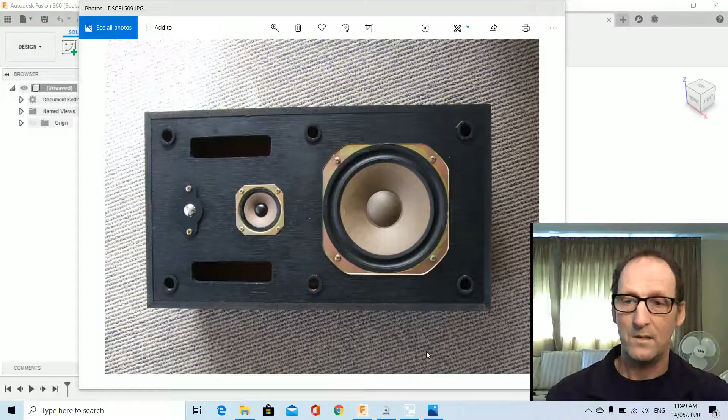In this video we're going to make a speaker bezel for this mid speaker in this three-way Panasonic speaker from back

in the day. I'm a secondary school teacher in New Zealand. We've been in lockdown like the rest of the world, and we've been doing online learning, but secondary schools, well actually all schools in New Zealand, start again this coming Monday, so I'm just going to do a bit of preparation here.

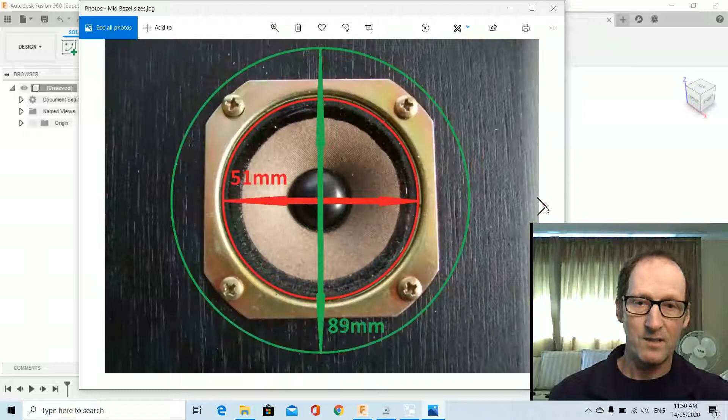Okay, so what we've got, there's the speaker there. It has a bit of a lip or indentation there, and those are the sizes that we're going to make the speaker bezel. Also location of the holes. Right, I'm going to get rid of this thing here now and go and show you because it's in the way a bit.

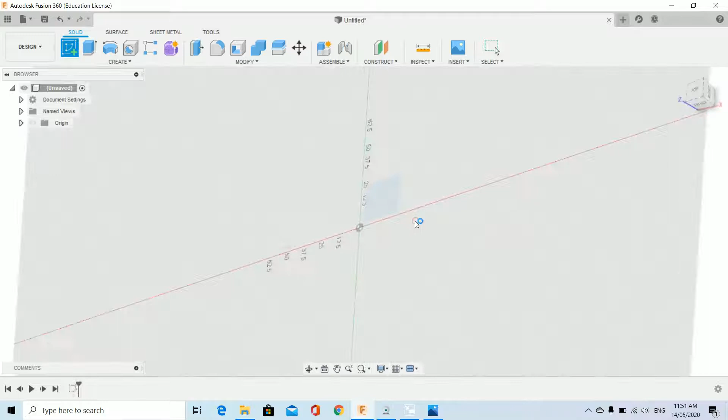Right, minimize this. Right, I'm going to show you 3 or 4 different ways. First one is going to be real basic. Create a sketch on the horizontal plane. Got to do 2 circles first, one 51mm, 51 enter, and the next one 89. And that should refer us back to, we'll go back, just double check, 51, 89. Finish sketch, could finish it here, click on that one, or it could be done down the bottom there.

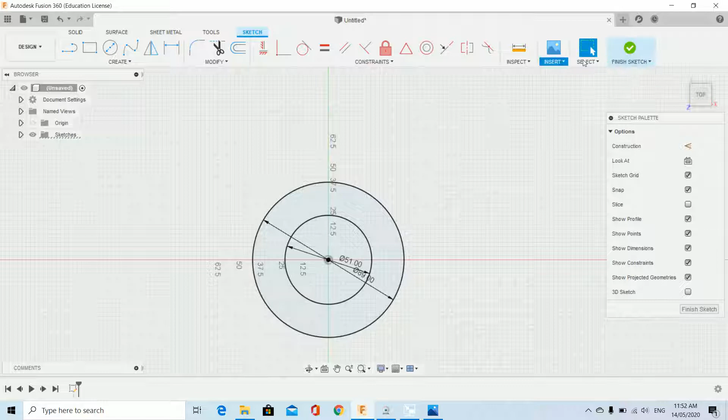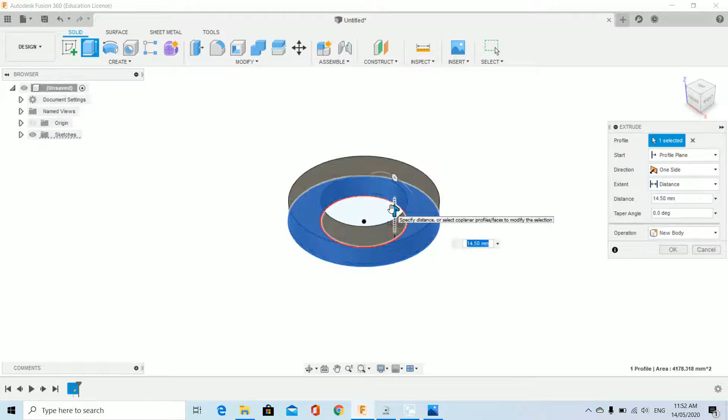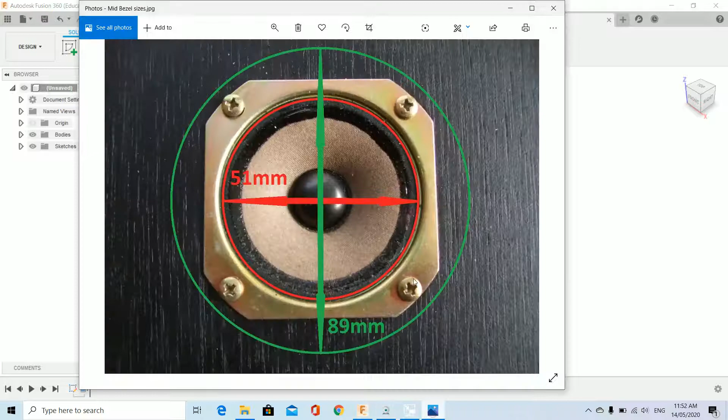The first thing I'm going to do is extrude those. So I'm going to right mouse click, press pull, not selecting the middle, I'm selecting the outer ring. I'm going to lift it up, about 6mm. Enter. Now I'm going to turn this around because in our speaker, where it lips in, I have to create a bit of a lip for it. In this part here, and then back lipping down over the edge.

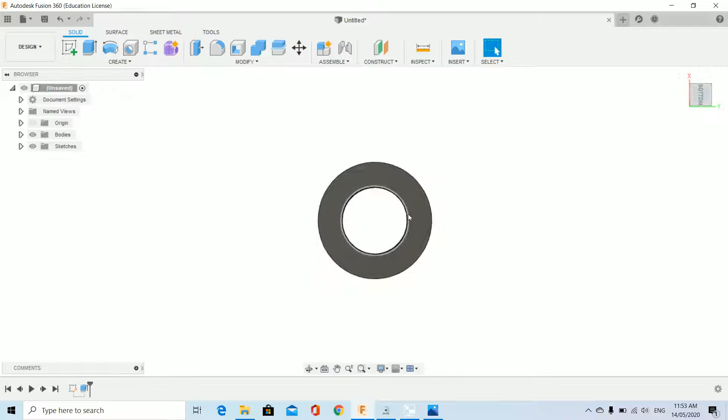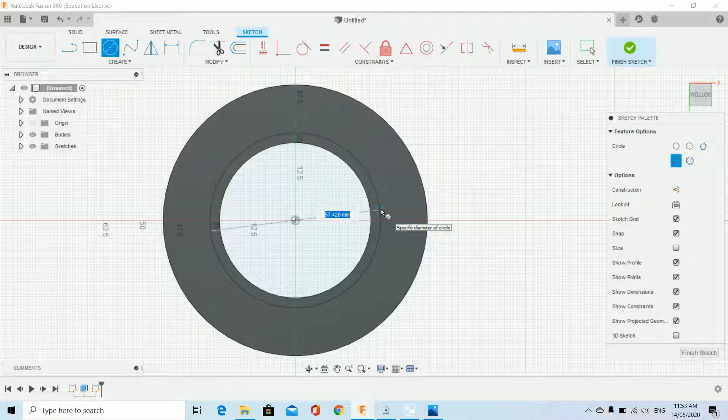So we're going to create another sketch, but I'm just going to flip this around first. Create another sketch. We're going to do it on that face there. And I'm going to do some more circles. So center point. We're going to have a 2mm lip there. So instead of 51, I'm going to have to go 55. And then I'm going to do another one. This one needs a 5mm lip, so we're going to make that 79.

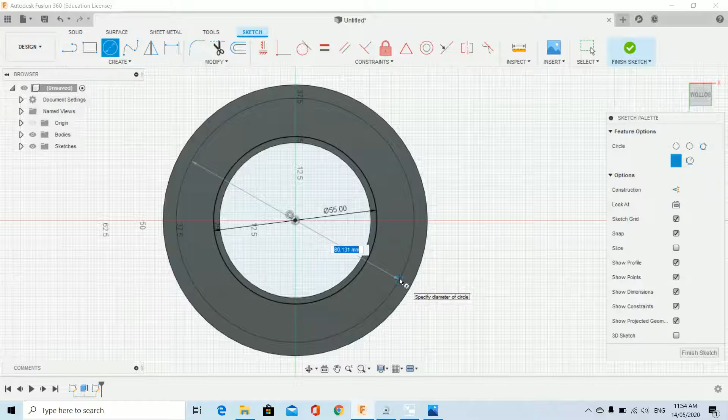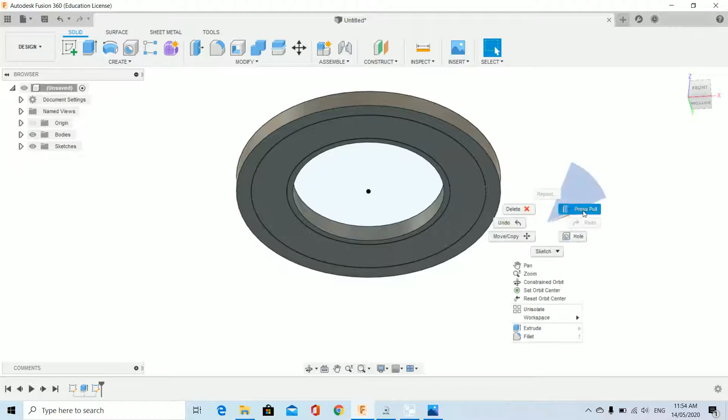Finish sketch. And hold down the shift key and press down the mouse so I can rotate. I'm going to do a press pull and bring these out a bit. 2 mils on this one and 1 mil on that. So press pull. 2, enter. Got to see the sketch again because the sketch is hidden. So click on press pull. Select. 1, enter.

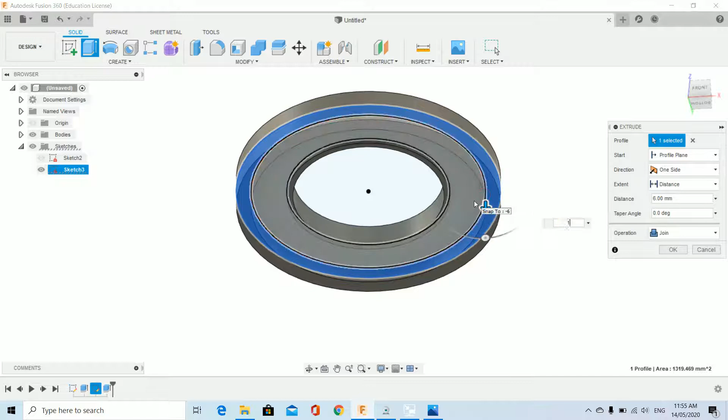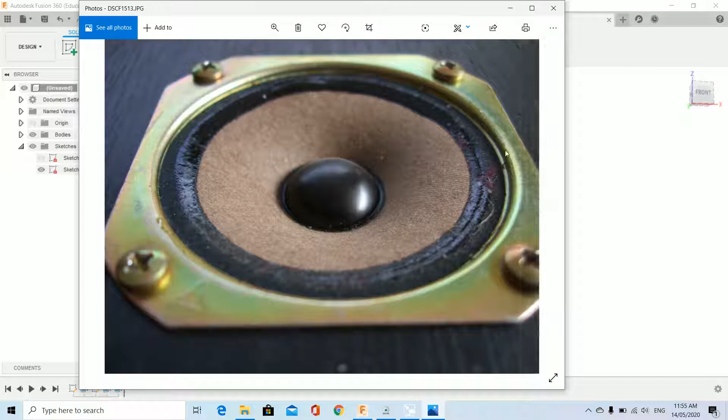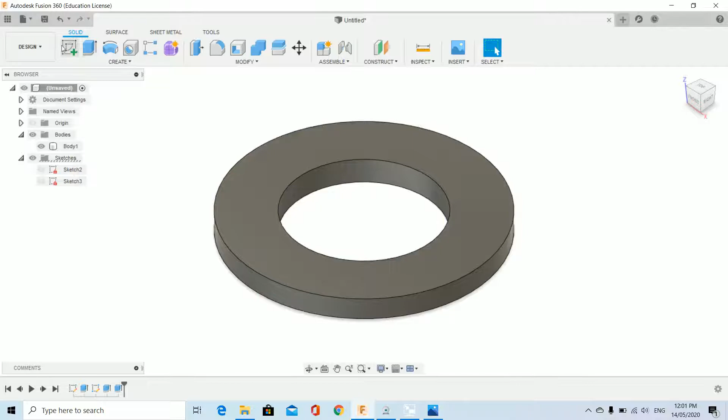Shift key down so I can orbit around there. And you can see I've got those 2 lips, and the inside one's a bit deeper so I can fit into that lip there, or lip over, and this one, the outside rim. So go home. Now we need to put in some holes. Then we're going to put in a bevel and a bull nose. So next I'm going to do the holes based on here, 47mm back. So sketch, do it on the top surface.

I'm a bit of a newbie here, so there's probably heaps of better ways of doing this, but first I'm just going to set out some construction. Click on construction, line. I want to get on to the degrees, so I'm going to click on tab to get to degrees, and I want 135. I don't know why it went that way instead of going 45 back that way, but anyway, that's a computer program. And I'm going to go out here, hopefully it's going to snap at 45, and it has. I want that one to snap at 90, and it has. Snap at 45, and it has. Finish.

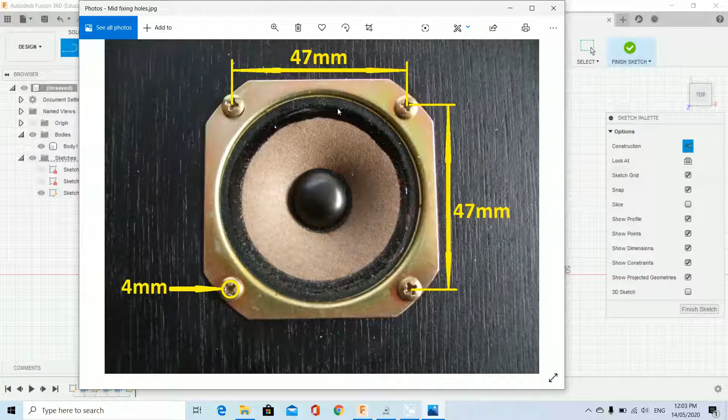So these holes are 47 millimeters. I'm going to put a line here to the center point along there at 23.5, which is half that. So let's do it. Right. I want that to be vertical, 23.5. Another one, 23.5. Well, we want it to intersect with there. There it is, 23.5, horizontal. Click. And now we're just going to cancel that job. We're going to go out of construction, and we're going to draw the circles. 4 millimeter diameter circles. So that'll snap into there. 4, enter.

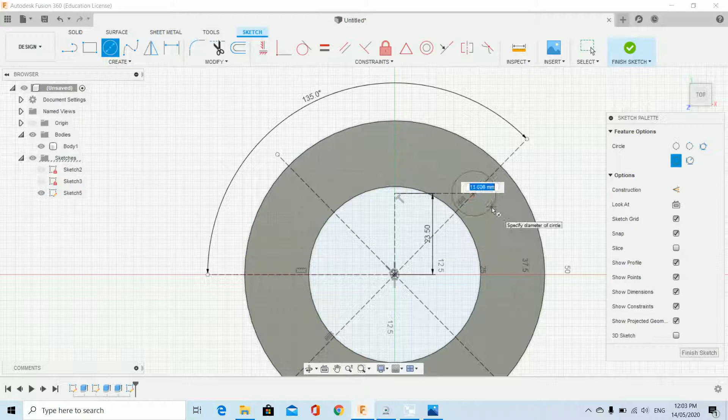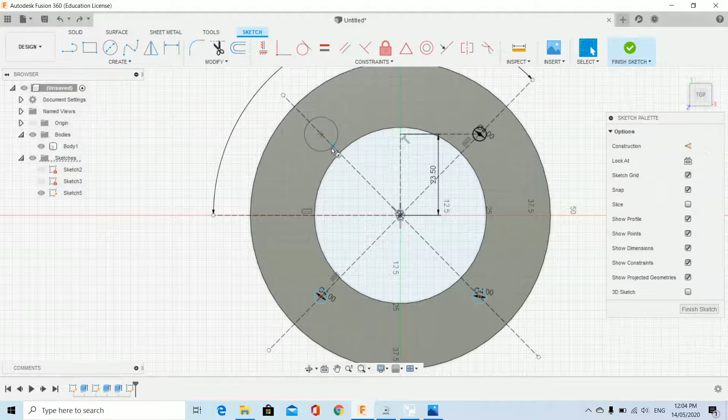Center point circle, I can get it there, but also I right mouse click and go repeat center point circle. Now we want it to be in line with that, so I'm going to draw that down. You can see that blue line snapped on. 4, enter, and again 4, enter, last one. Oops, mistake. Undo. Circle. Draw across. Snap. 4, enter. Finish sketch. Right, going to extrude them.

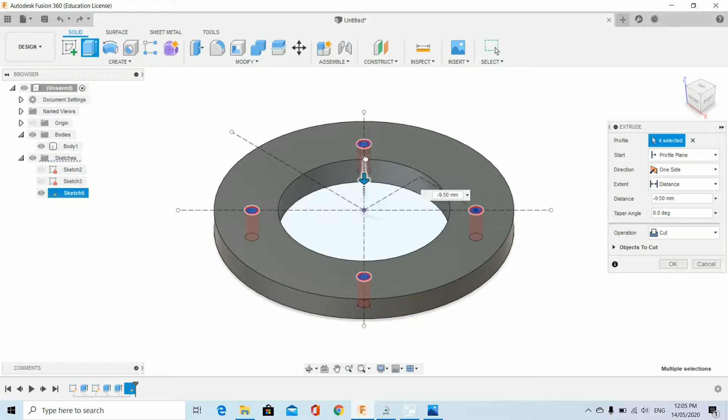Right mouse click. Press pull. Select. 1, 2, 3, 4. We're going to go down minus, more than -6, so -8 is fine. Okay, and now we've got holes. Last jobs is we're going to bull nose, and we're going to chamfer. So I'll put a chamfer on here. Chamfer, we'll do the bull nose first. We'll fillet it. I'll give that 6.

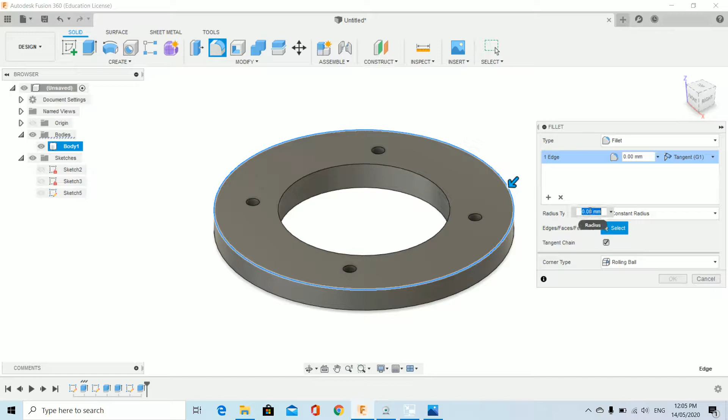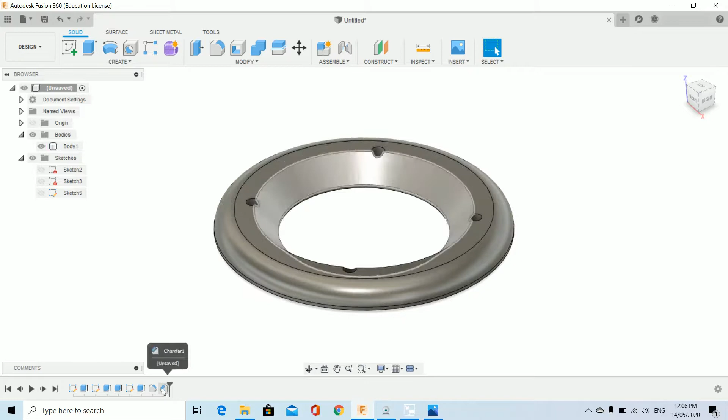And we're going to do a chamfer at 45 degrees. We'll make that 7. Now I'll make it less than that. So we can edit that feature, so we don't really want to go into those holes. Right mouse click. Edit feature, and we'll make it like 5. Fantastic. So that's the first version of the speaker done. But it's pretty straightforward.

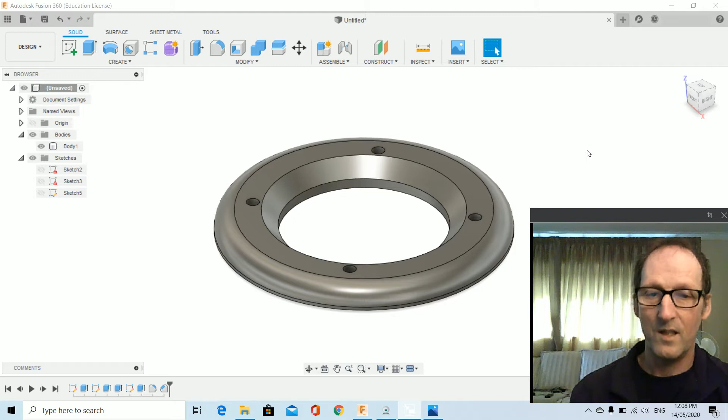Okay, so we'll say that's the end of video 1, and then the next video we'll try some different techniques where we use a loft and sweep, and we're going to base it around a profile.